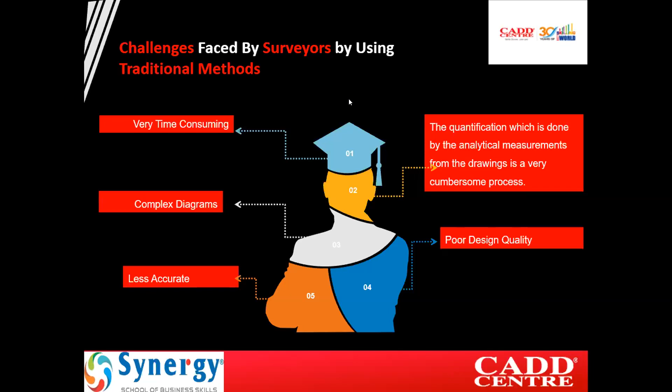You can see, by using CAD softwares the process is very time effective. There is flexibility and these diagrams are easily editable. Moreover, they are easy to save and share information, and there is improved communication through documentation. Results are more accurate compared to traditional designs, and there is improved design quality and increased productivity of a designer. A designer who uses 1, 2, or 4 hours on a simple design using traditional methods can complete that same design using CAD softwares within 30 to 45 minutes.

So how many softwares are there? We'll see step by step.

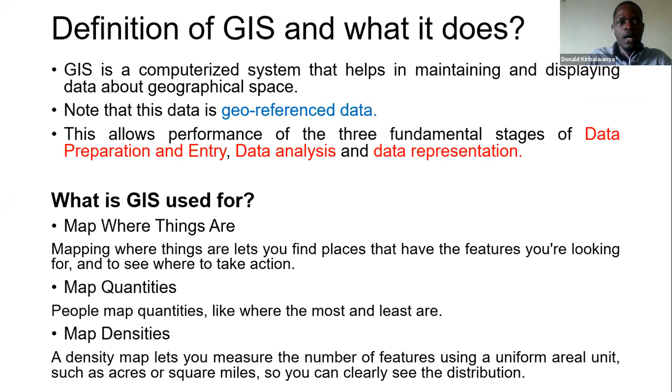Moving further, where has GIS been used? One, governments use GIS, for example in the recently concluded elections, when deciding different voting districts, they use GIS to do that. Even analyzing demographics, UBOS, Uganda Bureau of Statistics, uses GIS to analyze demographics from one district to another. Then also timing street lights can be done using ArcGIS, through creating linear buffers to see which areas and spots require street lights.

Then, briefly, we have some companies which use ArcGIS in Uganda. Here I've put three: one is Uber, which most of us use, there is World Health Organization, and there is the National Park Service. So I'll talk about each of these companies that use ArcGIS briefly.

With Uber, Uber is a company that relies heavily on geospatial data, as one can see when they request a ride. The app matches each user with the closest driver who is prepared to take a new ride, and the driver arrives at the rider's precise location and transports them to their destination. This is made possible using GIS. For example, the app identifies what areas have the highest need for drivers. When you request a ride, it will search for the closest or nearest drivers, then notify those that are available so that you can have your ride.

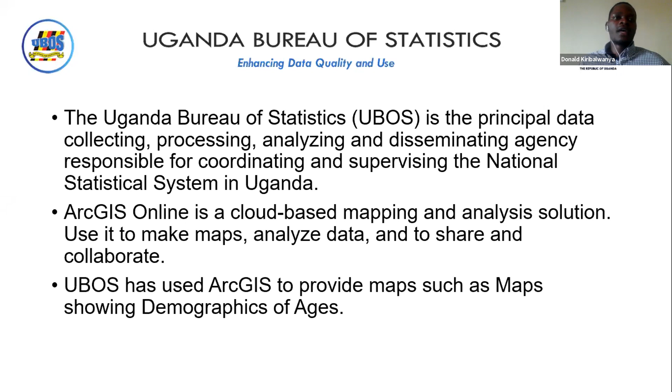The United Nations High Commissioner for Refugees, UNHCR, also extensively uses ArcGIS in providing maps for analysis and decision making in various parts of Uganda. One of the maps is the refugee statistics map, which shows which areas have refugee camps. Then there's another map that shows the presence and refugee locations in Uganda, and also the refugee hosting districts in Uganda. All these maps are provided through ArcGIS.

That's when you are able to have these maps with you. So I've shared the different links there that can assist you to get access to shape files and other data. Then also you can have a look at those maps that UNHCR uses for its activities.

Now I want to talk about the role of GIS in the COVID-19 response.

ArcGIS has been used in this COVID-19 response, particularly in providing data for decision making.

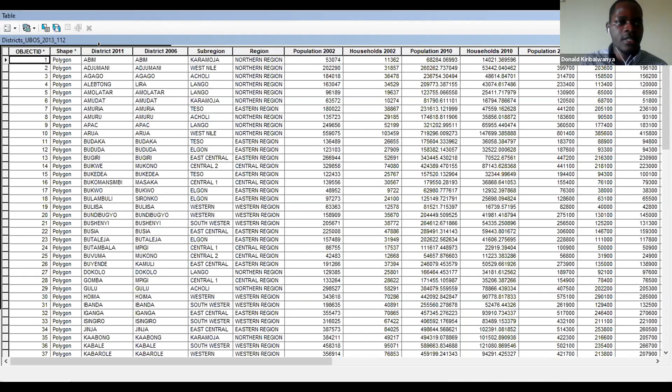But before you can do this, you need to know what information your shapefile has. With this shapefile that I've added, realize that it has districts as per 2011 and as per 2006, the sub-region, region, population, households, population of 2010, households of 2010, population of 2013, male and female - various information within the attribute table.

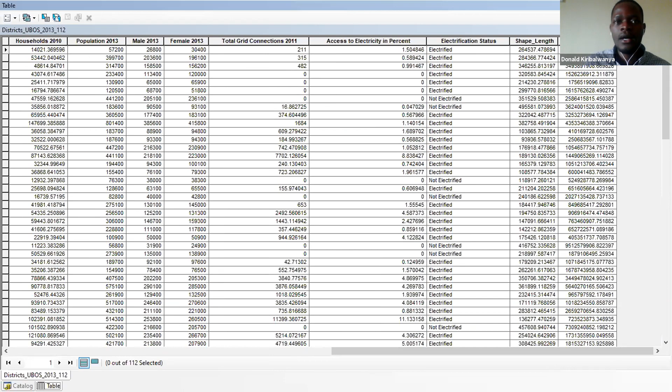You see there is access to electricity in percentage, electrification status, the shape length, and the shape area. Once you know the information you have there, you can close it for the meantime.

We can go ahead and try to explore a bit. So we right click on this layer, move to properties. There is general, source, selection, display, symbology, and fields.

So I want to look at the symbology, so you come to categories here. Can you still have a view of my screen? Yes, it's visible.

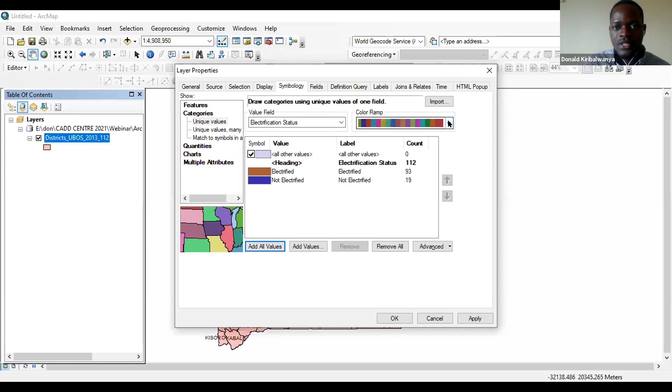So now we've looked at among the attributes, the attribute table, we've seen the electrification status. With this, we want to know which districts have electricity and those that don't. You select the field, electrification status, select the color ramp, then add all values there. You can change the color ramp a bit.

So after adding that, you can apply. Let me just change the color ramp a bit.

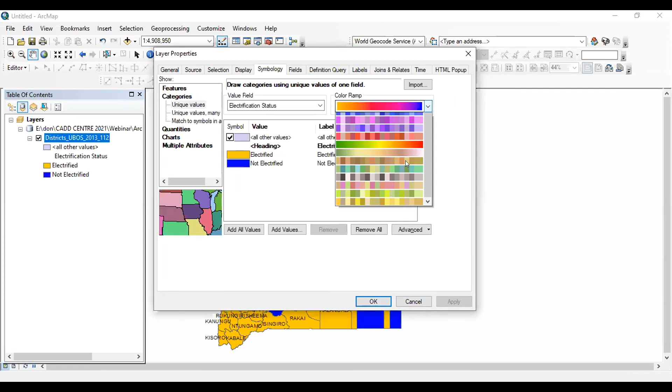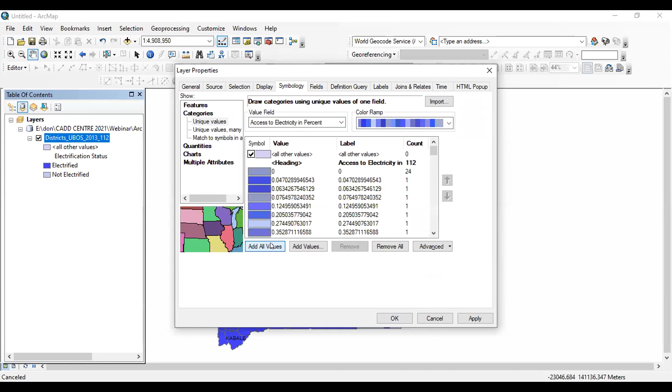So if we go to that, okay, that is those that have access to electricity. When you add all, when you add those people that have access to electricity, when we click OK, so these are the percentages of the different people that do have access to electricity. So you realize that the biggest percentage don't have access to electricity, which is, and those that have access, this one, the 0%.

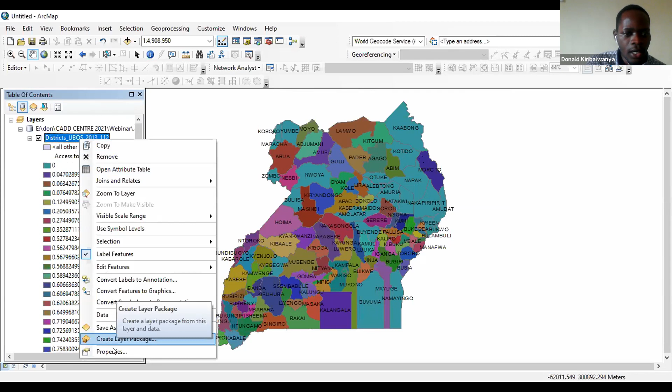The Kaabong area, Kaabong regions, Yumbe, Kotido, they have no access to electricity. So we can take on one more attribute. If we go with a population of 2010, yes, it's also the population of 2010.

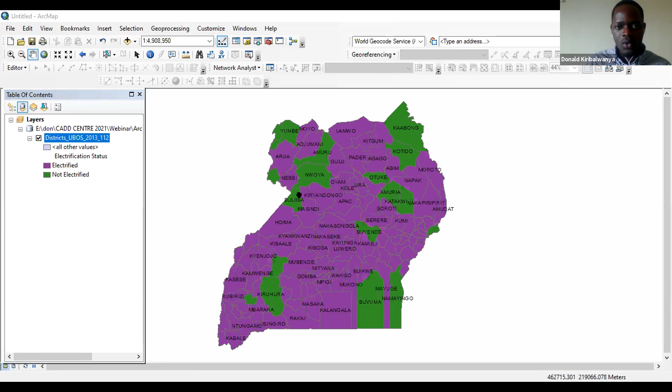It's quite a number. So for the power map, let us go with this to try and see how we can come up with a map. So with this that we have here, we can. I want to briefly take you about how to come up with a map and what a good map entails. So we realize we have two views. We have the data view, which we've been working on, and we do have the layout view.

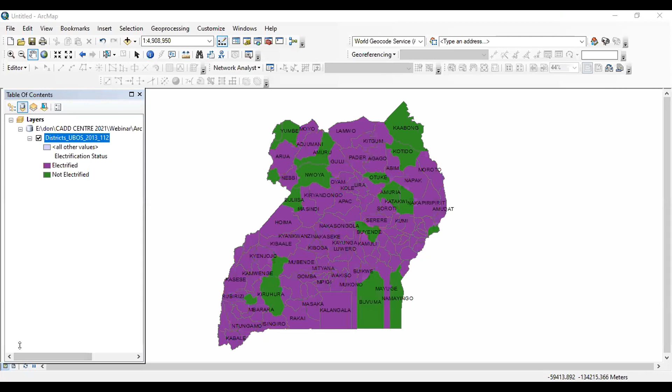Within the layout view, that's where we can be able to create our map. So down here, I'll just switch to the layout view. So when you go to the layout view, you'll have this display. So one, our map we need to, because it's showing the areas that are electrified and then those that are not electrified. So our map should have a title.

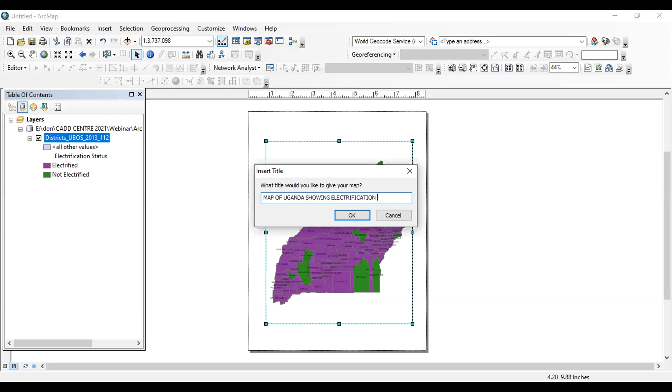So we come to insert, and give it a title. So: Map of Uganda showing electrification status. Okay. So our map has a title.

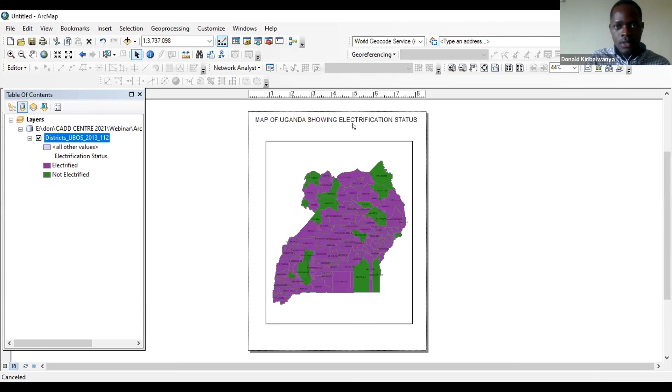Two, our map should have an author. So you come to the dynamic text, you add an author. So I'll just come to properties. Here, right click, come to properties. Our author, let me say our author is CADD Centre.

We can select the size. A minute, we select the size. Shall select the size, a moment, just taking long. Okay, so the size we can maybe give it 16. Okay, then we apply that. Okay, then we can click OK. So our author is CADD Centre.

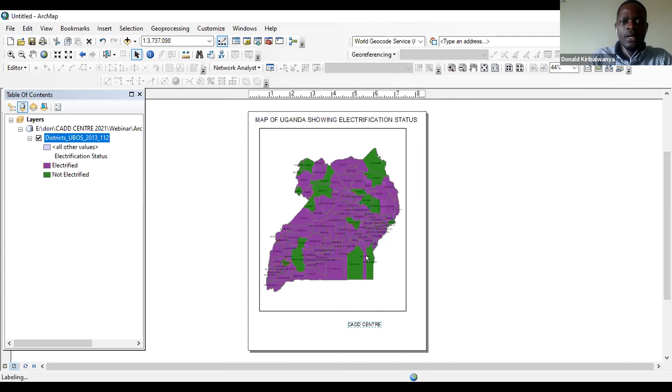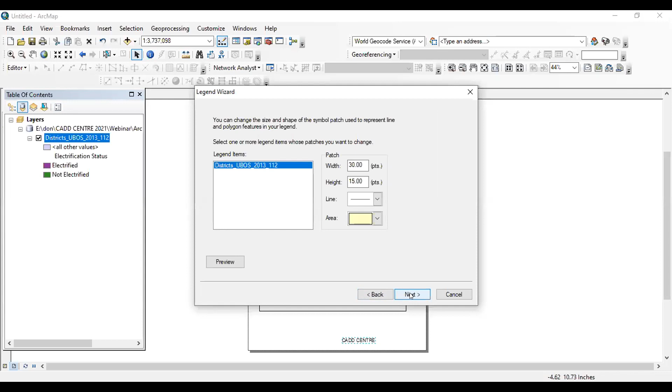We shall have the legend. You come back to insert here. There is a legend. Then you add the different fields. Then you go next, then you finish. So when you finish, okay, so our legend is just right here. Our legend, it is showing the electrification status.

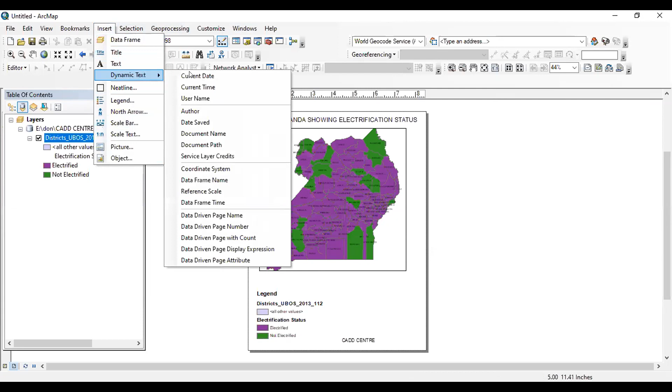Then our map should have a date. A good map should have a date. So you come to dynamic text and insert the current date. It does a date, so the date is just right here.

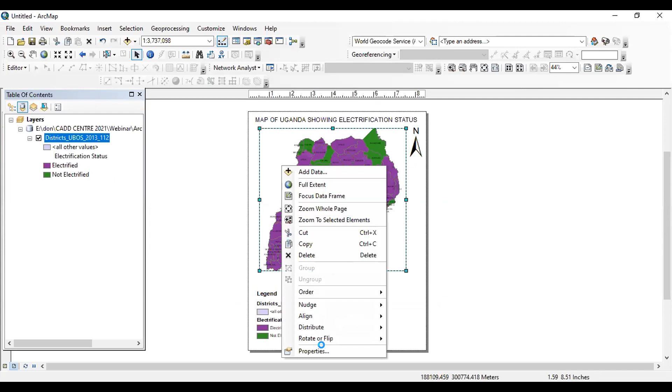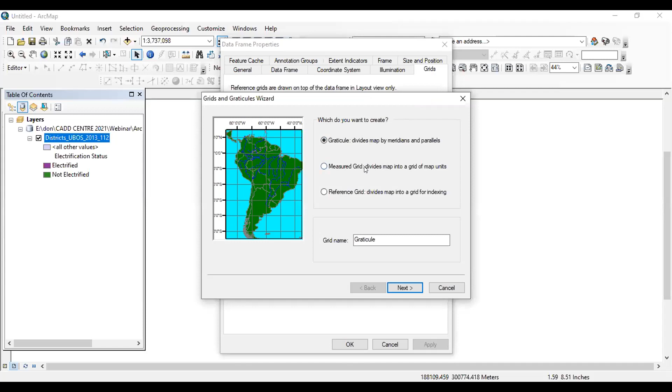Yeah, the north arrow. Then I'll add the grids to this map. So you come here to this frame, the data frame here. You right click, come to the properties. Come to properties, there is where we have grids here. Then you select new grid, you go to a measured grid.

Then you click next. You move ahead with the grids and labels. Then you proceed, so store as a fixed grid. Yes, you need to update. Then you apply, so our map has grids as well.

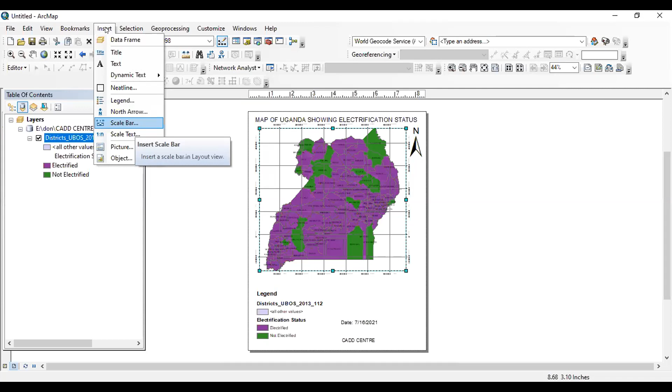Then we need to now add the scale. Yeah, the scale. Still you move just here to insert and insert your scale. There is a scale bar and the scale text. So I'll add the scale text. I'll select the absolute scale, go to properties here. There is this one and then the relative one. Select the centimeters, then the map units will be meters.

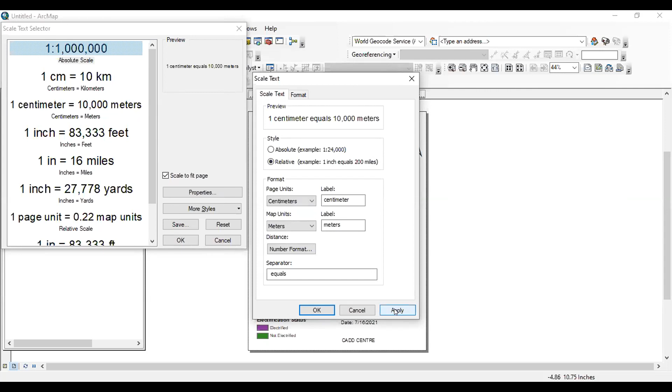Apply. Okay. And select OK. So let us just make this bigger. Let us just make this bigger. You come to the size and position, and the format. Briefly, it will, a moment will change. Just a while.

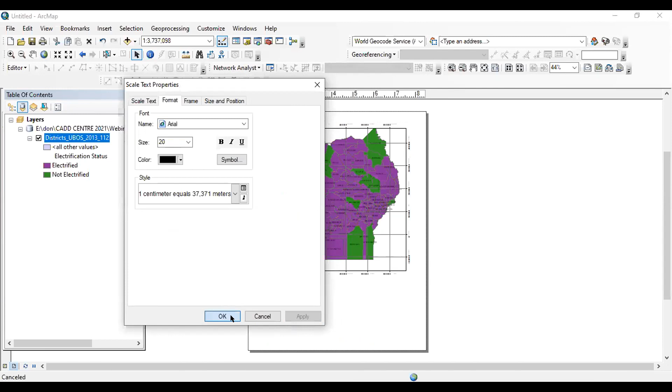Okay, the format, you can adjust the size here, maybe 16. Apply. Make it 18. Apply. Can make it 20. Apply, okay. So it has a scale as well.

So our map, we've managed to come up with our map that is showing the electrification status of Uganda. We can see the regions which are not electrified. So the next thing to do is we can go ahead and export and save this document.

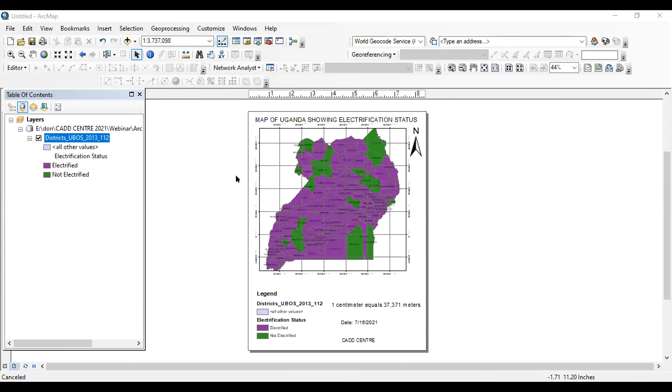So you have to export, we shall export it as a PDF. Maybe before we can export it, let us first save it as an ArcMap document. So let me select where we should store it. Good, now. Okay.

Uganda map showing electrification status. Uganda map showing electrification status.

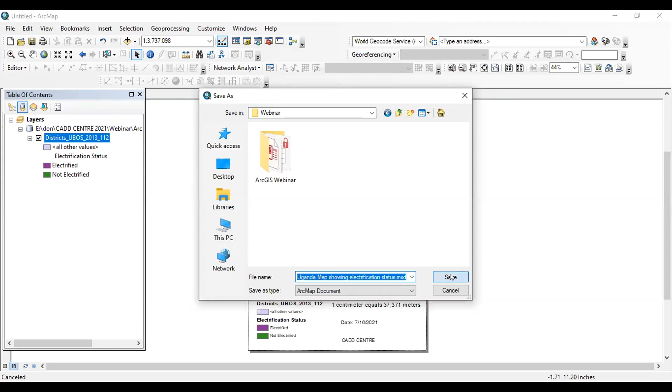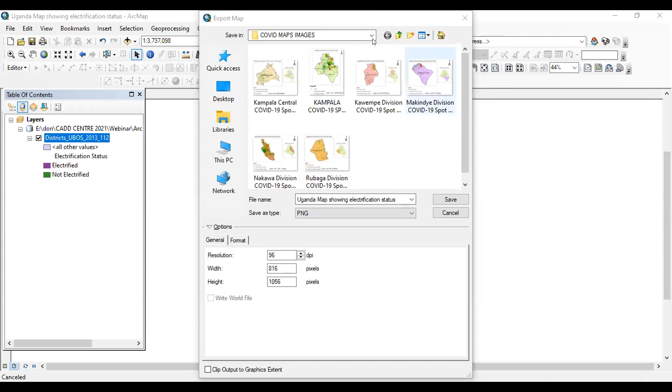Okay, then we save the ArcMap document. Then we can as well export as a PDF. You can export as a PDF or as a PNG, as an image. So I'll just select where I need to store it.

Then we save it. So when that is done, we can let us have a view of, let us just have a view where we've stored it. All right.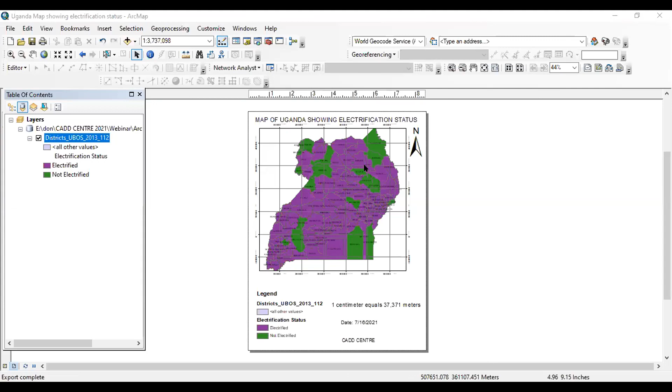Yes, let me just share this. Yeah, can you have a view of that? Yeah. So that's the map that we've managed to come up with.

But as we said, ArcGIS is beyond, the end product is beyond simply a map. One, it can show you a map that shows you exactly what you want to see, or what you need to see, what your aim is. Then it's beyond just a map, there is analysis that you can make with the use of ArcGIS.

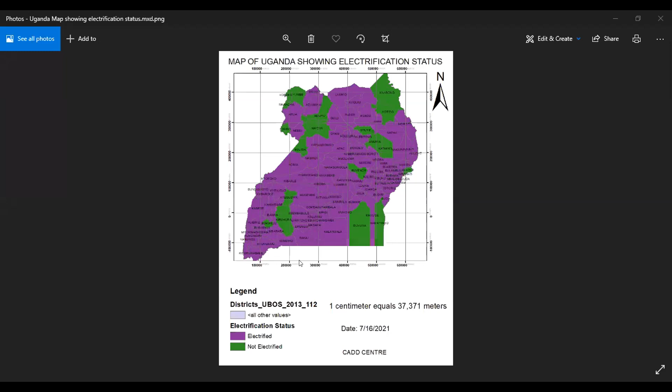So I'll just go back to the presentation. Yes, so that was a brief software demonstration of how we can come up with a map, how we can simply make use of ArcGIS to carry out our work as surveyors. So my lecture will conclude.

I'll leave you with this, with a quote by Pele, the footballer. He said that success is no accident, it is hard work, perseverance, learning, studying, sacrifice, and most of all, you must love what you do.

Yes, for the surveyors I leave you with this quote, and all the rest of the participants I leave you with this quote. We need to love what we do as surveyors, we need to love what we do in life, and we have to continue learning and studying to see that we achieve success. Thank you so much. I will hand over to you, Anjali.

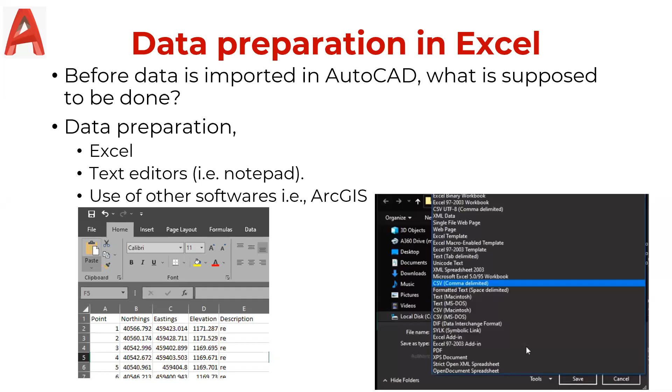Other softwares like ArcGIS can be used - you can have your file from ArcGIS, import it straight into AutoCAD and work with it. These softwares can be used hand in hand. You find that some tools are more visually appealing in ArcGIS, yet here they won't be visually appealing. So you can do your work here, then export it the other side, or do your work from ArcGIS and bring it back this side. So the process is actually possible.

So some of the data inputs we have, if you have a 3D model, you can have different data formats like 3ds, DAE, DXF, and for points you can have CSV. There are many others, you can even have a point file. You can also import an AutoCAD drawing. Then we can also look at the export formats - you can export your 3D model again in that.

Then point cloud - this is very useful if you're dealing with point cloud, you have your drone data, your laser scanning data, you can work with it straight into Civil 3D. That's how powerful it can be. Those of you who have worked with point cloud find out it's not that easy to work with, needing a lot of computing power and technical know-how on how to go ahead with it. But it is the future, that's where we are going, so we should adapt to how to work with it.

I'm going to show you some of the things that you can do with the point clouds.

Coming to the workspaces, when working with AutoCAD, first and foremost you need to know which workspace you're working in. Otherwise you get a problem, you call someone saying the tools have disappeared - the problem may be that you're using a wrong workspace. For example, you can see civil 3D drafting and annotation, 3D modeling, planning and analysis. You may want to be in civil 3D but you're in 3D modeling instead, with a totally different interface, and think you've installed the wrong software, but it's just your workspace that has a problem. So I'll take you through how to change from one workspace to another, how to edit.

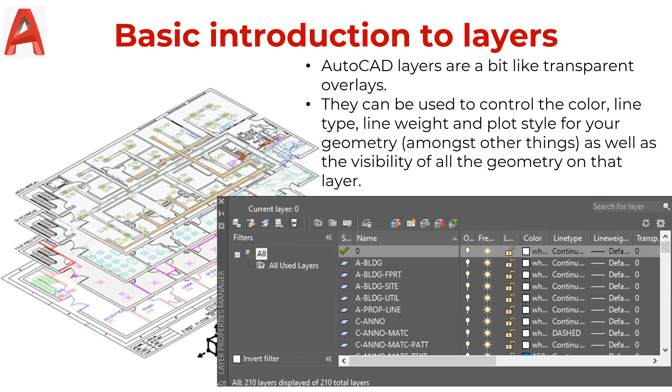And also points. With layers, it gives you room to differentiate and organize your work. The same goes with points. A point can just be a dot, but representing something. It can be a dot representing a tree, a light post, or a markstone. But you may want each markstone to look different, and trees to look different too. So you can make use of point groups. They're very helpful. You just group your points into different point groups and work with them.

So for the boundary opening, I think most surveyors know what I'm talking about. We can actually prepare our boundary opening, setting out data from this software. It is very powerful for that, depending on how you manipulate it and how you want your work done.

If we talk about people doing the work, you find they had issues here and there, having to go back to the previous file and stuff like that. It's still possible here, but this software makes it very easy, so you can prepare your work in actually 30 minutes and get started. Most of us in the surveying world have adopted that when you go to the field without a computer, you may not be able to do the work, because what you have in the data is different from what's in the field. So with this software, once you're used to it, you can go to the field, find a different story, come back to the software, add just a few things, and have your setting out data ready before you know it.

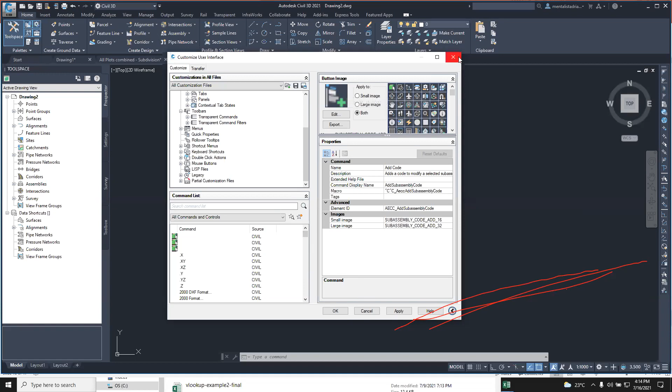There are many commands, millions of them that you can use here. So that is the issue about workspace. Let me save this. That is the point I wanted to make about workspace. In case you have a question, you can prepare it for after I'm done here.

So, user interface using options. Let's see how you can change your user interface using the option tool. I'll go back to my drawing. You see this interface - you may be interested in a different interface and you don't want this one.

Hello? Yeah, I think I was muted, but I hope I'm back on.

Yes, I was saying that you may want to change this interface - it looks bad for you. You want maybe a lighter blue interface, or a pink interface. People have different options, of course.

So how do you do that? You can come up here, then go to options. Via options you can see different things. We're interested most especially in the display. See the theme you're using - it's a dark theme.

See what happens if I change to a light theme - the software is going to change. Bear with me, it takes some computing power, so you may experience some delays. But you can see the software has actually changed to a light theme. Some people may be comfortable working like this rather than the dark theme. Me personally, I like the dark theme, so I'll switch it back on, then click apply.

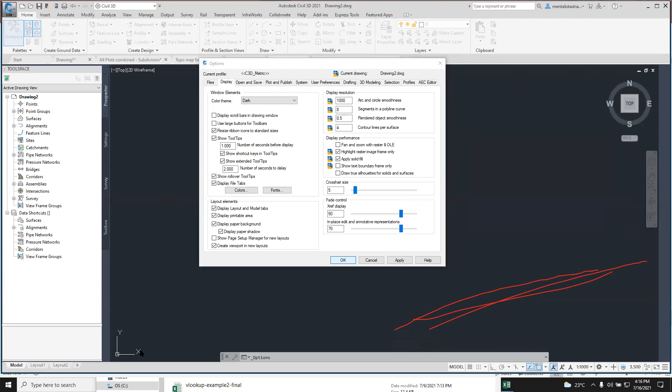Then there's the wireframe - you see the wireframe is this, you see that dark thing that has remained. You can change the color there too, and even change the color of the cursor if you want. That can also be done in the options view.

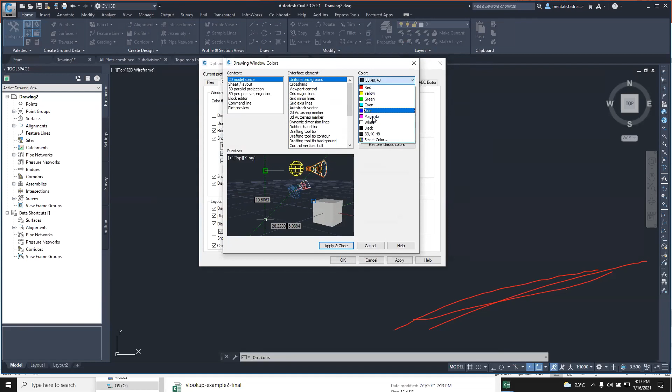Go to options - now here you can come to colors. See, I can change the color of my background, maybe to what? Let me change it to a funny color, maybe like that. You see, it has changed. Someone may be interested in working like that - I don't know who that might be, but you never know.

So you can change all this. You may also want the typical black instead of the other. See, now this is typical black, not like the other one that was there. You can also change the crosshair - from here, the crosshair is that plus thing that is there when you're working. You can see it here. You can change the color from white maybe to yellow - you can see it is changing.

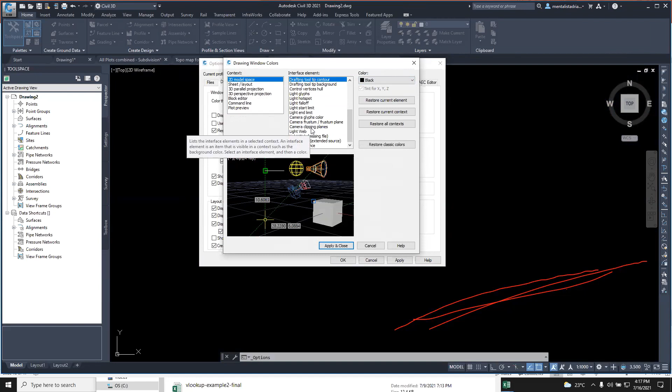So there are many things you can play around with if you want to change, depending on how comfortable you want to work with your software. That's it with the options. In case you have any question, you can again prepare it for the end of this.

Then let's look at the layers. Now for layers - Civil 3D, except from, I think, 2009, whereby when you open you find you have to create layers one by one - here, when you open a new drawing or start working, it actually has a lot of layers. If I go to my layer properties, just found up there, you find that you have a lot of layers.

There are many, and you may not need to work with all these layers - you may want to create them one by one. So that can be done. First, you need to delete these layers that are there. But if you've worked with this software, you see that some people find it hard to delete these layers first when they start their drawing. That can be done using a command called LAYDEL.

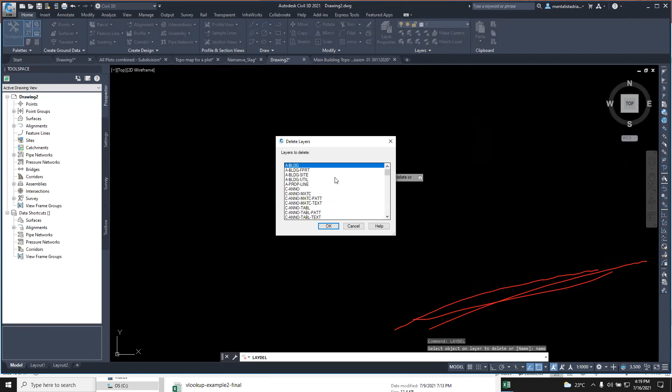You see that? And then you specify that you want to delete them by their names - it will highlight all of them here. So you may not actually be interested in working with any of these layers, you want to create your own layers. So you can delete them by just pressing OK - just delete the layers.

So if I go back to my layer properties, I don't have any layer - I just have layer 0. This one you can't delete because it's like the default thing.

You can't delete it, so it needs to be there. For example, going back to my work, I know I have center lines and road edges. You may have other things, so let me create layers for them. I come up here to new layer, create one for center line, that is CL, and another for road edge, RE. I can change their colors from here, let's say yellow for center line and red for road edge.

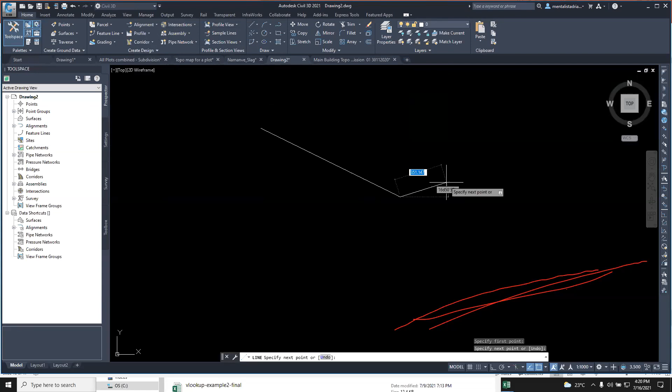When you create a layer, it's not automatic that it becomes active. This layer, center line, is yellow, but check what happens if I start drawing something, maybe a line - you see it's white. If I click on that line, you can see it is on layer 0. So how do you activate a layer that you've created?

If I delete this, I'll come back to layer properties. There are two ways to do this. One way is from layer properties, whereby you click on a layer, then click here, set current layer. So you click on it.

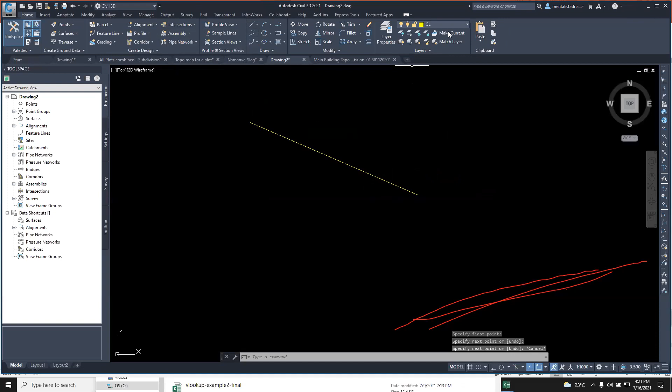Let's see what happens if I try to create a polyline. Hold on, create a line - you see, now it's yellow. It means it's on the layer for center lines. So that's how you can deal with layers.

Layers, as I told you, are very helpful. You need to know the concept. You will get to know how you can get messed up if you have a lot of data all on one layer. You want to work with something and not see another one, so you have a really detailed topo with a lot of features, but if all of them are on one layer, you can actually get problems when working on them.

For another thing about layers, you can activate them from here just by clicking on that. If I click on road edge, it has activated it. So if I try to create a line, you can see that it is red. That can help you.

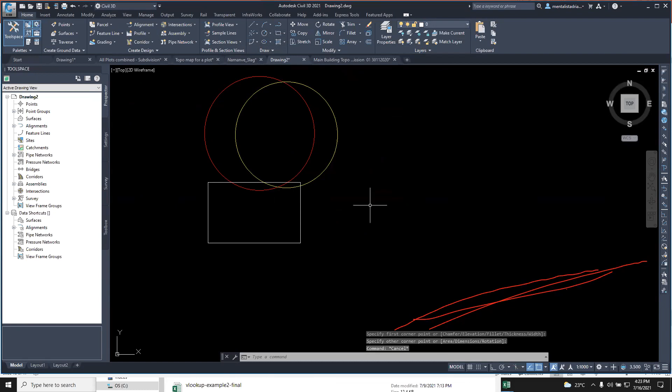Just a small description - let me say I have a drawing. Let me make something here, say there are circles, simple as they are, and again here. These are three different objects. They may represent one thing, but they're just on different layers.

I may just want to view red and not view these others. I can switch them off just by clicking on yellow - I switch it off, and I switch off that also. You see the other features have gone away, but they're not deleted, they are still there. If I want, I can just put them back on. So that's one of the concepts you can use when dealing with layers.

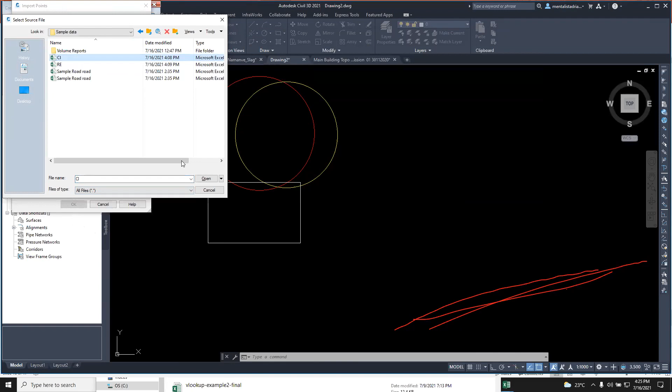When you're importing these points, make sure the Excel file is actually closed. Otherwise, if it's open, it won't accept. So that is also one other thing to note.

I need to look at the format of how my work is set up. You see this, it is in PNEZD format. These codes mean something. If it's PNEZD, the P stands for points, N for northings, E for eastings, Z for elevation, and the description. My points were in this kind of format: point number, northing, easting, elevation, and description. Should you click this wrongly, you can actually import the data incorrectly. The data may be prepared well, but if you import it wrongly, you get wrong results.

So I want to add them to a point group. I'm going to show you how to create one. Just come here, then maybe CL, standing for center line. So the points are going to be imported, but they're going to be on a layer called center line. Then I click OK.

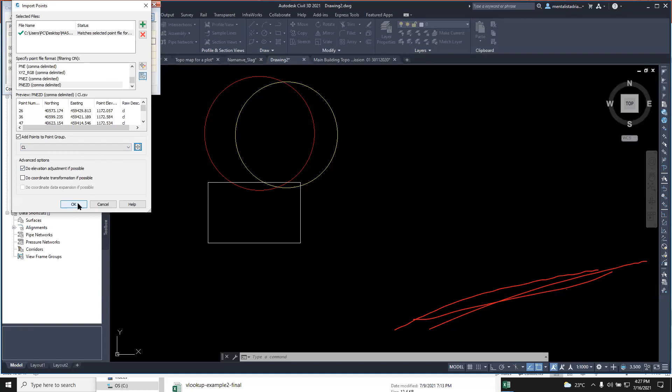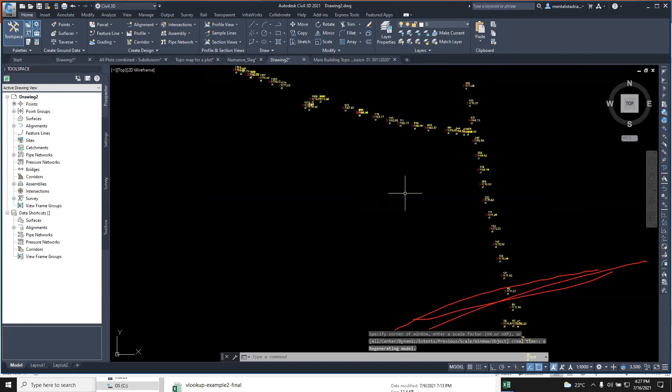You may see that nothing has happened, but something has actually happened, it's just that I'm in a different view, so I need to zoom to extent. So these are my points, you see? These are my points, and if you look at them, they're actually on my layer called center line.

Let me also import road edge. Just come here, point creation tool. I don't forget to change this layer. I may want to import, change there. Come to road edge. I want to look at the points here, which are here.

Road edge. Oh, actually now this is refusing. One of the reasons might be because the file is still open. Yes, it is still open. So let me close it.

Go back to importing it. Road edge. So now it accepts. That's what I told you, that if it's not accepting, there are many reasons that may be, but one of them is because your file is still open.

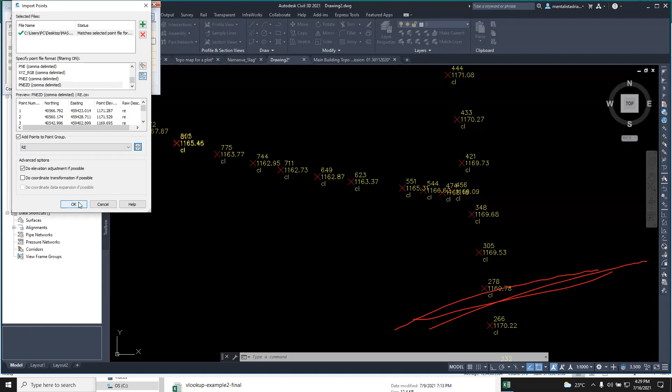Also another point is when you still have those headers, the points, northings and stuff up there, it won't work. My format is here. And add to a point group. I create one called road edge, RE. In that case, click OK. Everything is okay, just click enter. So my road edges have actually come in.

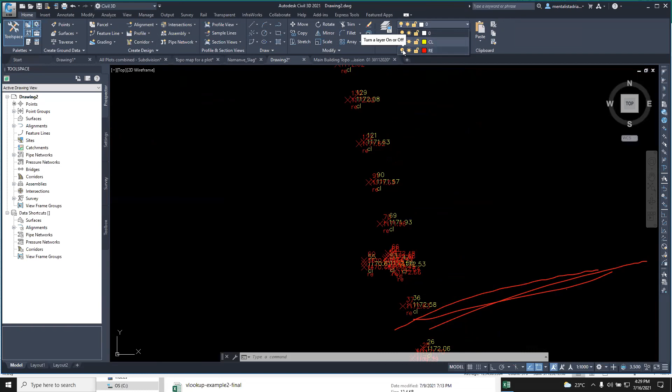But you see, if these things were all on one layer, just look at the confusion that would be there. Maybe I first want to work with center line. Let me first switch off these others. See, now I have my center line.

So point groups help you to actually edit the way you see these points. You see here, the upper one is the point number, this is the elevation, then the description. I may just want to only see the description. I can make use of point groups to edit this.

Doing that is simple. Just click on the point, right click, go to point group properties. Then I come to the point group properties. I can change here the way they look. I change the marker to be just wanting something like that.

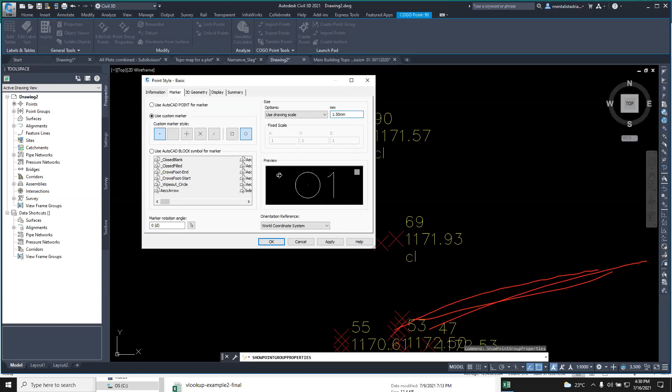And also I can be able to change the way it looks, just a moment, the size. Let me see, it's that. When I apply, you see, my points have changed. They are now looking better.

I need now to change, to remove this, and then I just remain with the description. If you want the elevation on, you can leave it on, because that can also help you in analyzing, most especially for topographic surveys. You may just want to analyze how your topography is actually going.

So just come here, layout. Under layout is where you can actually see these things. For example, now we see point description, I want it on. Yes, it's on. Now, if I want to remove point number, just come to point number, visibility, I change it to false.

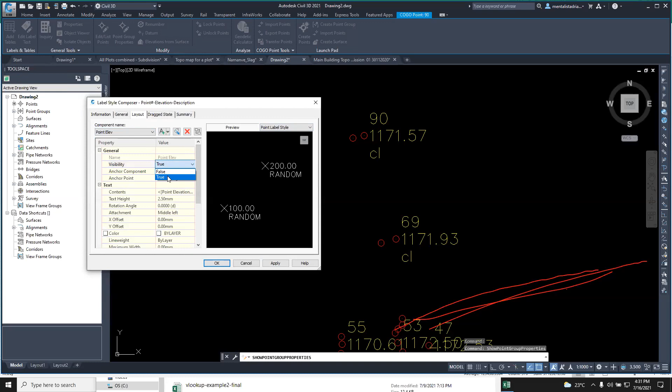And then elevation, I also don't want to see it, I change it to false rather. So when I say okay, and I apply, I only remain with center line.

But I want you to note something here. This CL is actually representing this point. This is not okay here. You may be able to see it, but just imagine you have 100 kilometers of a road and all points are like this, you might actually get confused. Is it this one? Is it this one?

So you can actually change the settings for this, the placement of this description. Just come back to our layout. You come to here, the offsets, the Y and X offset. I want to change the Y offset maybe to 4.

Maybe 4, let me see what happens. See, when I apply, now the center line is actually close to my point. So that can also help me to see how my points are.

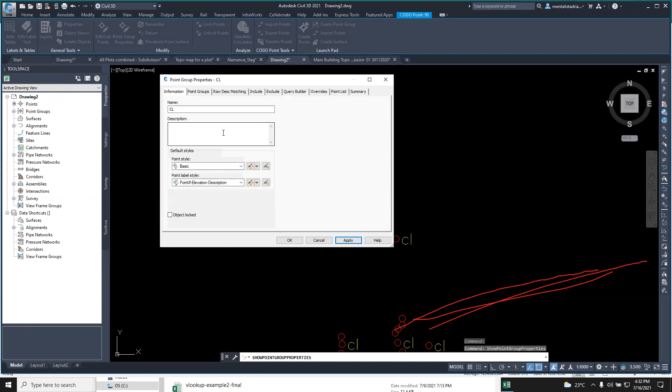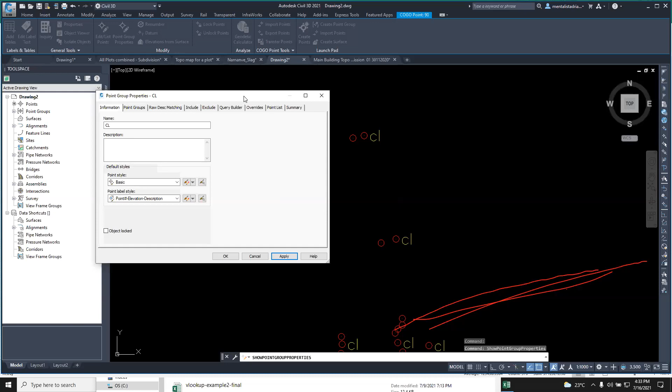So this is a point. Now, if you don't have point groups, you're going to find it a problem to edit all these things, because you might actually want different styles for different point groups. You might want the center line not to have the description, but then you want maybe the manholes or the trees to have the descriptions. So by having them in different point groups, it can help you do that.

So, something I didn't tell you, one is the difference between a polyline and a line. A line is just a connection of 2 points, that's all. For example, create a line and it's just there, just a connection of 2 points. But a polyline is continuous, it's something you can create like that. But you see, now this is a line, because each node I click on is just 1, 2, 1, 2.

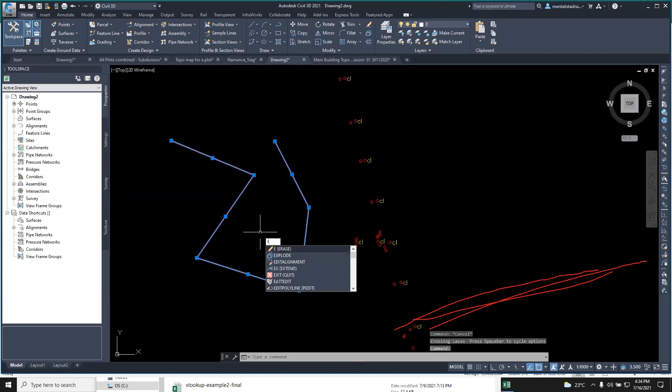But when you're joining a topo, you cannot use this, it will not be helpful. For topographic surveys, we normally use a 3D polyline. A 3D polyline will also put in the aspect of the elevation. Remember, when we are dealing with topographic surveys, we need X, Y, and Z.

If you are dealing with boundary openings where you're not so much interested in the Z, you might just use a polyline, but here you can use a 3D polyline. So if I come to 3D poly, it's just here. Click on it, we can be able to join.

You need to put my snap on. Osnap, just a moment. Let me first put my snap on, let me check all of them. This one will help you target the points. Let me go back to my 3D poly. So I can target the center of that point.

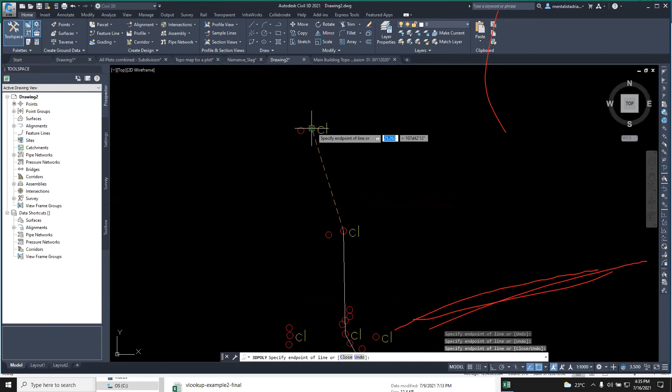So you see, I can join my points like that. Most people make a mistake and don't use a 3D polyline, and just use a polyline. A polyline can be just on a straight plane, which you might actually not be wanting. You want something that can give you the alignment or the profile.

And if I click on this, you see the other one had broken. Let me go back to the lines, see this one, each section was broken. But then here it's just a continuous thing. This is what you should use.

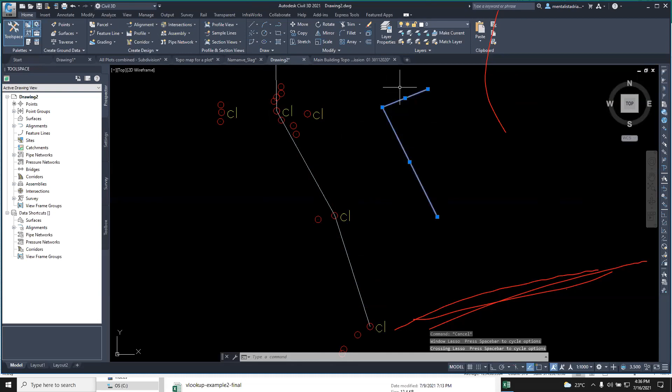So that is how I've handled the points and the lines and layers. If in case someone has a question, you can always ask after this.

So going back, so I've handled this, then the lines and poly. So let me show you some of the examples that I did for the subdivisions, then the topographic maps, some of them. Subdivisions are here.

These subdivisions, for example, you might have a plot. Actually this person had a plot that was having all this, it was all one plot, but then they wanted to subdivide. If you're doing it manually, it can take you close to what, maybe 3 hours. But using a parcel tool, you can actually do this work in 30 minutes.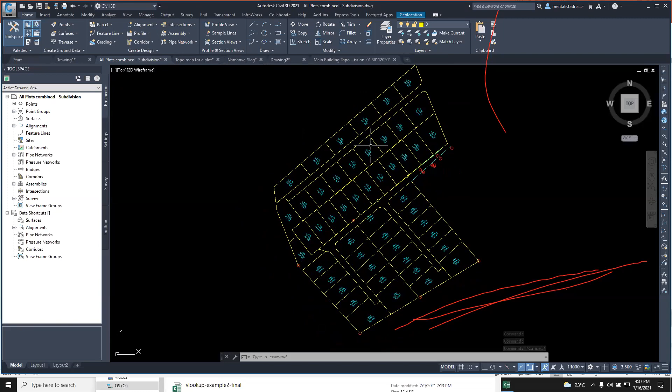So the parcel tool is actually here, if you want to see. But with interest of time, I may not go deep into how to use it, but it's actually possible to create layouts like this in 30 minutes. So after creating your layout, you just export the points, the cornerstones, then you go back to the field and set out. So you don't have to waste a lot of time on subdividing and stuff like that. You can use the parcel tool for that matter.

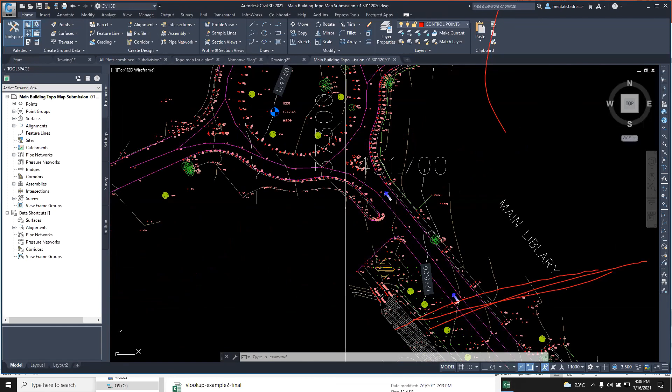Then I want to also show you one of the examples of a topographic map that was created. It's actually here. This is a topographic map that was created using AutoCAD Civil 3D. You can see that I have my contours labeled well. And you see, everything here, the concept of layers I was trying to show you is here. You have different work in different colors.

You cannot achieve this otherwise. Actually, you can achieve it by changing it to different colors, but you might have problems when you want to switch off something and leave another one. For example, you may just want to remain with the road, only the road, maybe want to visualize it. And if you have all these things on one layer, you cannot switch off one and then put it back on, you have issues there.

But then this is one of the maps, and with this I can be able to export it, maybe print it and stuff like that. For exporting, you can just say plot.

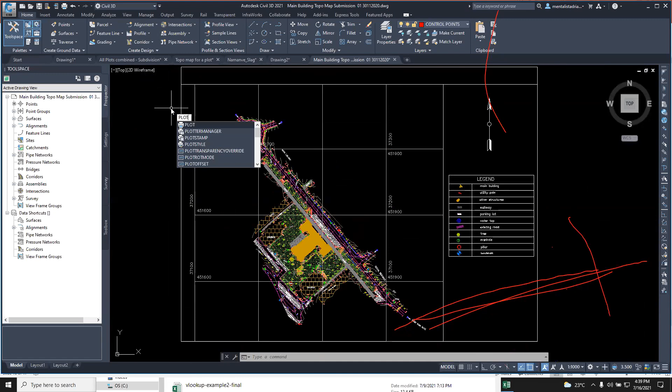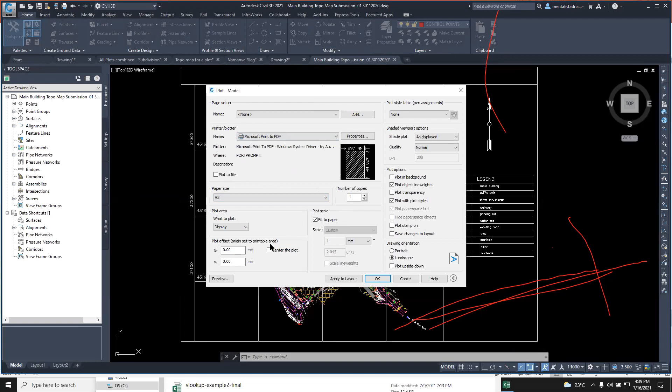I'll continue to plot a single sheet. So you can do the settings here. Maybe I want to export to Microsoft PDF. I want to export on an A3. I want it to center. Just a moment.

You may be having a lot of drawings, but then you just want to export that particular one, so that can be possible. Just export. It's exporting now. It's asking me where to place my PDF. Click and save it here.

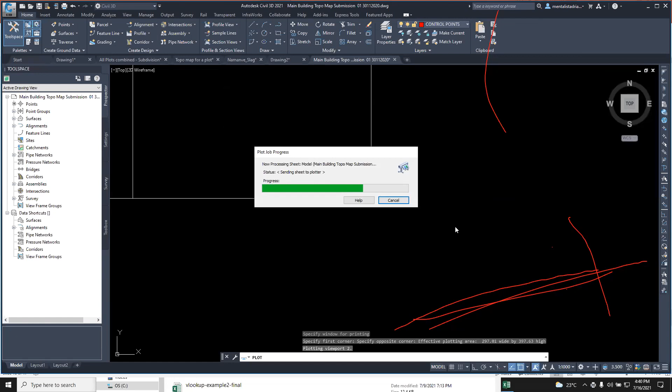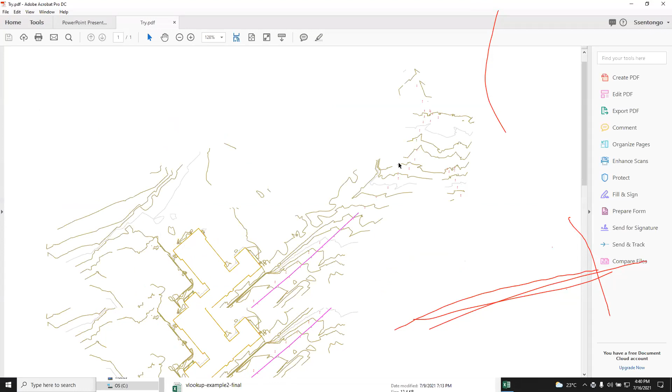Maybe try. Yeah, so that's how you can actually export your work after you've done it. Maybe your client wants a map to show where the plot is and stuff like that. All that can be done in here. If I go back, I can view it. If I go back to my work, it's here, my PDF, and I can be able to see it. It's not looking that beautiful because I've not changed the colors and stuff like that, but I was just showing you the concept of exporting. So you can go ahead and print it to change the way it looks.

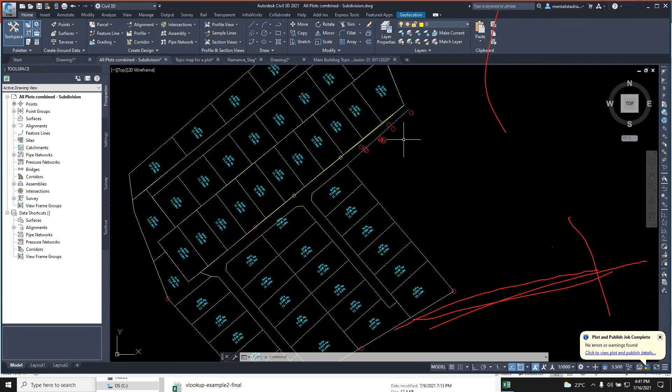So those are the examples of topo and probably the subdivisions. So this subdivision, I won't take time. Maybe you can invest more time or resources to learn how the parcel tool works, because as surveyors we actually need it. If you are dealing with real estate designing, you have your clients, and most of them have estates, and every time they're developing, they're designing, and you can also change the layout.

For example, a client, you can create a layout like this, but then the client doesn't want this layout. They want you to change a few things. If you're doing it manually, you will have issues. It will take a lot of time, but here with the parcel tool, just change a few settings and you'll be having your layout ready before you know it.

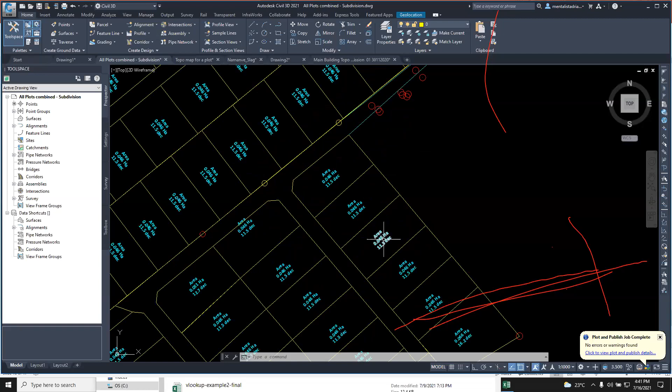And you can actually see that you can set the kind of area you want. It can be able to do for you a residue. All that can be done.

Then the last thing I want to show you is a demonstration of computation of volume. You might have a client, for example, if I go back to this. They have maybe their resources, as I said, maybe sand or something like that, and they want to have an estimation of how much of that material they have.

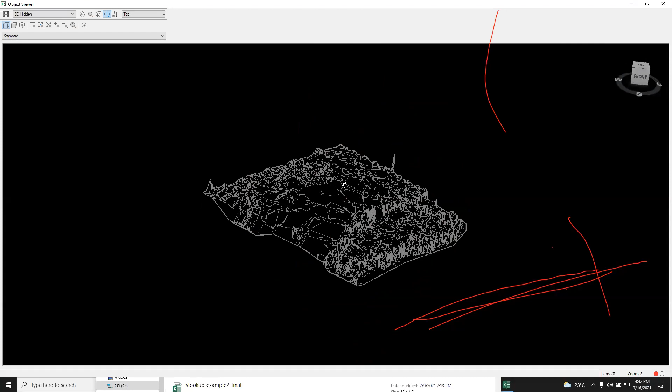So this work was done by a drone. It was actually some stockpile that was somewhere, and they wanted to know the volume in that area. If I can go back and click on it and come to my object viewer, you can see that it is a 3D. It is a 3D, you see, it is not just a 2D thing, but it's a 3D.

But I want to know the volume to this. Maybe, for example, take that this is a terrain. Maybe someone wants to construct a building here, and you want to know how much they're going to cut, how much they're going to fill, how much they need - all that can be done within this software.

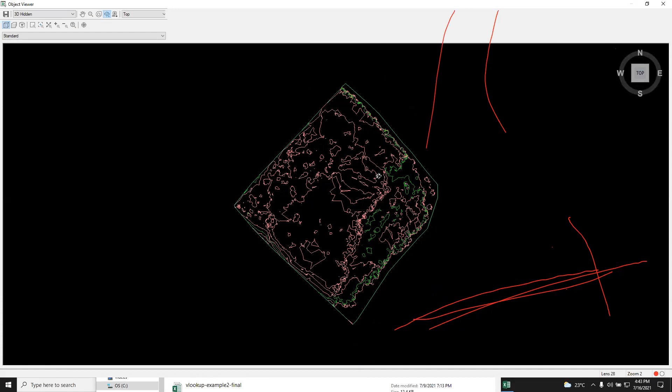You can even export your report after that. Let me first exit my object viewer and have my surface here. One of the first things when you import your file into AutoCAD for 3D, you first work on it and it'll be in RCP format. That is one of the formats accepted in point clouds. So you clean it, you make sure that it is ready for computation of volume. So you import it, you create a surface for it.

As I showed you in that example - excuse me, Adrian, sorry for the interruption. Yes, please. Could you summarize in 2 minutes so that we can go into the Q&A session?

Okay, yeah, maybe to save time. This is, you have your surface here, but then you create your base. You create two surfaces: one, the surface that has your work, but then you also create the base surface for you to create a volume. So that can also be done. Everything.

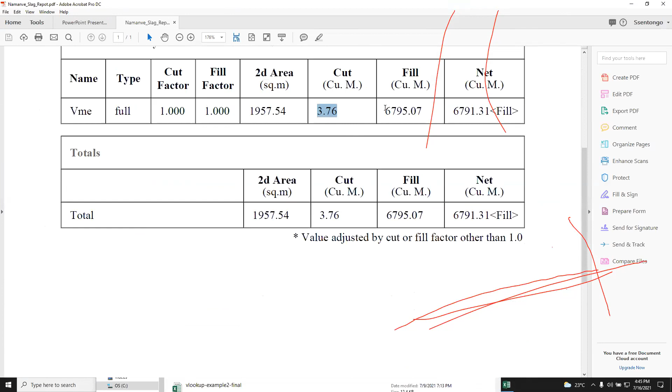You create a volume report, just a moment. Just in the interest of time, I'll show you one of the reports that was generated from that. You can generate a report like this with just a click of a button. It can help you know how much you're going to cut. You can see the cut, the fill, the net volume, all the details you want. So this is also a very powerful software.

We've just handled a very few things, actually less than 1% of what this software can do. So as surveyors, we need to see all the ways we can embed these kinds of things in our work. Over to you, Donald.